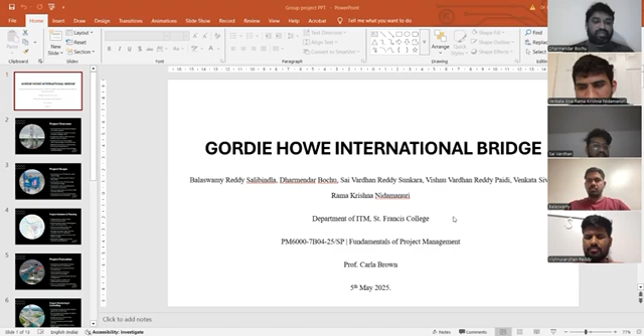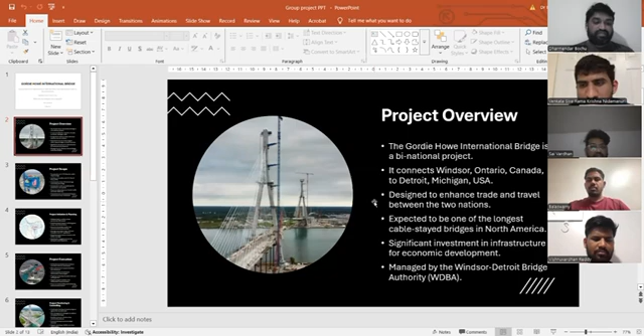The Gordie Howe International Bridge is an international gateway and socio-structural project that connects Windsor, located in Ontario, Canada, and Detroit, located in Michigan, United States. Its primary goal is to stimulate business and tourist traffic between the two states. The bridge is among the longest cable-stayed bridges in North America, and it means a big investment in the area for economic development. The project is carried out by the Windsor-Detroit Bridge Authority, and its goal is to increase the effectiveness of cross-border operations.

Now I am going to explain the project scope. It measures 2.5 kilometers in length and has Canadian and US ports of entry on the international frontier. The project also entails the development of an interchange with the I-75 highway in Michigan. Furthermore, the bridge includes walking and cycling facilities reserved for people, making it a multi-purpose bridge. Environmental tests were conducted to show how the project will improve the state's infrastructure status while boosting cross-border transport and business.

And the next slide is going to be explained by my teammate.

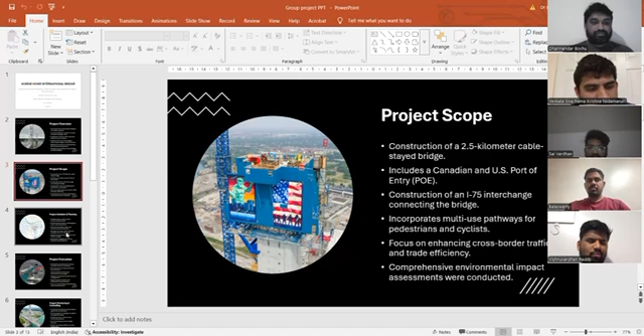Thank you, Dharmender. I will continue from now onwards. Myself, Venkat, and coming to the topic, project initiation and planning. Originally constructed as a public-private partnership, or P3 model project, the Gordie Howe Bridge project featured a clear project charter. This charter defined the objectives, project boundaries, and interested parties from the project initiation phase. Canadian and US rules and regulations on environmental impact were followed since feasibility tests and environmental scans were done exactly. A good corporate governance structure was put into place and the Windsor-Detroit Bridge Authority was formed. It was important for stakeholders to be on the same page during this phase of the process.

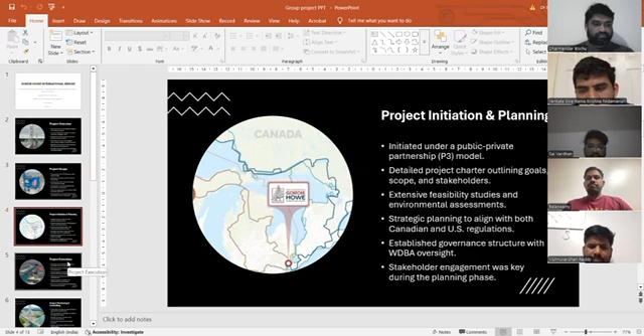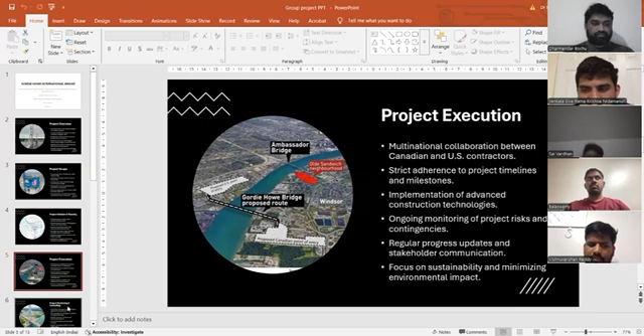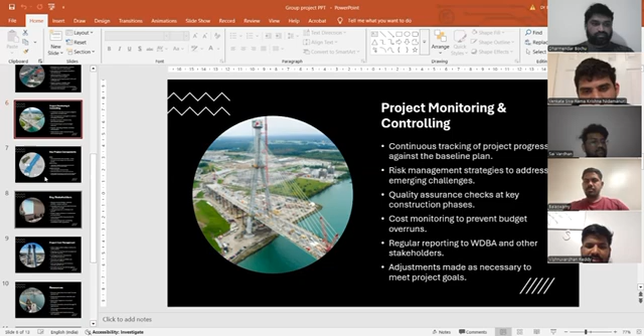The sixth slide is about project monitoring and controlling. Monitoring and controlling were very critical because they ensured the project was on the right track, maintaining a strong focus on comparing actual performance against the baseline. This included identification of control risks, with focus on quality control, assessment of critical resources, and preventing budget excess. Reporting was made open to the WDBA and other interested parties, and if the goals were drifting, necessary tweaks were made to bring it back on track. The next slide goes to the key project components.

When it comes to the construction of the Gordie Howe Bridge, the scope is extensive. The bridge has 6 lanes with an overall length of about 1.5 miles, and its main cable-stayed span measures about 0.53 miles, making it the longest in North America. This station ranks as a US port of entry and spans a ground area of about 68 hectares.

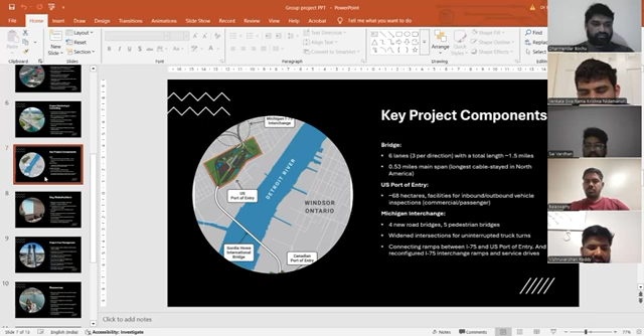It involves the inspection of commercial and passenger vehicles. In Michigan, the project includes 4 new road bridges and 5 new pedestrian bridges, along with traffic intersections widened to accommodate increased traffic. A considerable improvement in construction results from the rearrangement of the I-75 interchange, especially for the purpose of improving trade.

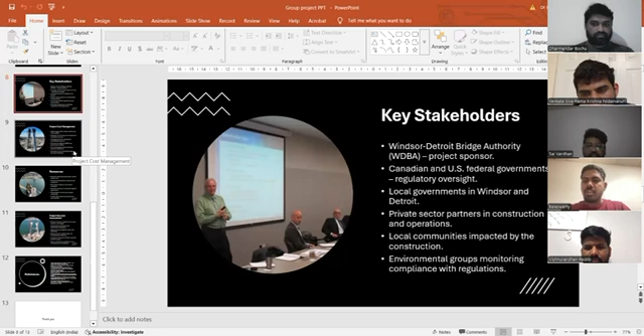Project cost management: the project was estimated to cost 4.4 billion CAD at the start. This was a big expenditure on both parts. Actual expenses were carefully monitored and controlled to prevent costs from exceeding the budgeted amounts provided. Contingency was provided to cover other incidental expenses.

The Canadian officials made sure that the project's finances were also controlled by the Windsor-Detroit Bridge Authority and government auditors. Much of the costs of this project were divided between Canada and the United States as cost-sharing arrangements, while further conventional cost-benefit analysis was conducted concurrently with evaluation of cost-sharing arrangements to improve the life cycle of the project.

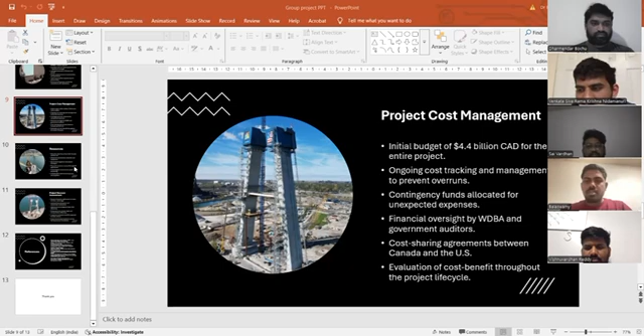Thank you, Balaswamy. Now I'm going to explain about resources. There are very many resources used in this project. There was sufficient labor input, both Canada and US, with specialized engineers and project managers. The construction was done using modern technology and materials.

Construction engineering and construction equipment were employed. Funds were raised with the help of public and private sectors, and the tracking tools were technology-based. These also included resources and purchasing more from local businesses and suppliers, which benefits both the local economy and the needs of the project.

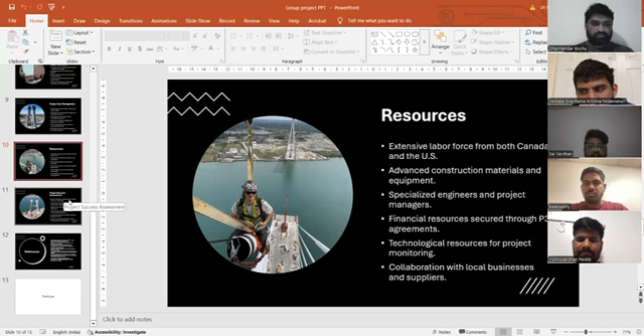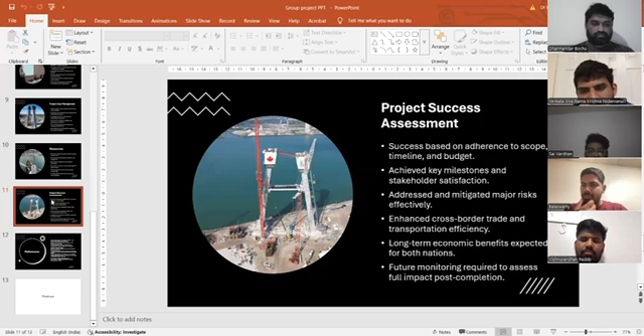Therefore, the Gordie Howe International Bridge Project can be considered one of the successful cross-border cooperations of Canada and US. However, challenges have been overcome by functions of well-defined scope, time and cost frame. The project will not only facilitate and enhance trade and communication between the two countries, but it will also bring profits.